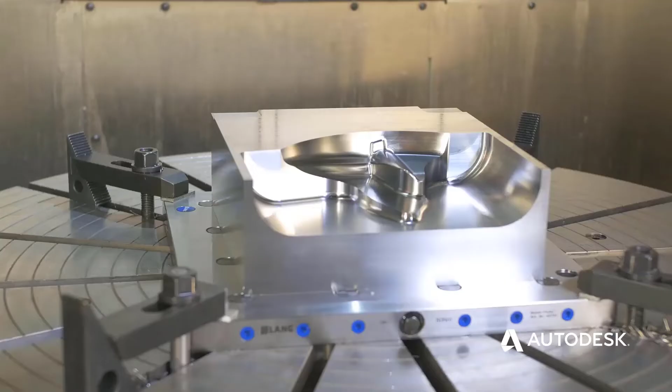We've got a really interesting part today. This is a traditional mold tool, and these are produced one-off, and then they're used in injection molding to create masses of parts. And this is exactly what this part is. This is a mudguard for a motorcycle.

Now, traditionally, this is machined as a one-off, as I said, but it's also machined out of a very hard material, a tool steel material. There's a number of key bits of geometry on this part today. So we've got some free-form surfaces. We've also got some complex geometries on the inside of the pocket. How would you traditionally go about machining this part?

Right, so after completing all the roughing and rest roughing stages on the job, I would then look to finish the steeper regions using a contour strategy. Contour is very good from anything from 30 degrees up to 90 degrees. Right. It gives you a constant step down, giving a real nice surface finish.

Okay. I would then machine the flatter regions. We'll have a choice of either a scallop machining or parallel machining. Got ya. And that will give us a nice even finish all the way across the flatter areas. Okay. This is actually a really good point.

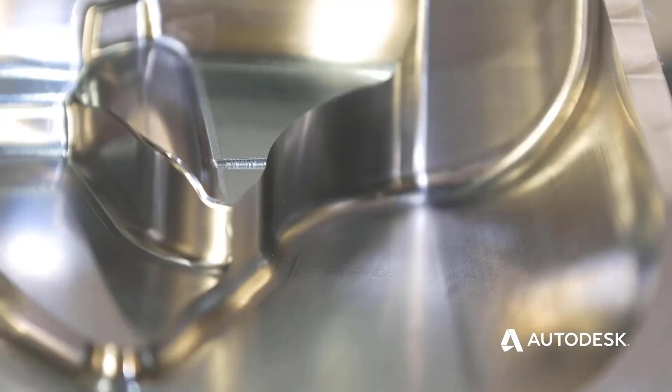Fusion 360 has just introduced a brand new toolpath called Steep and Shallow. And what this does is automatically identify the steeper areas of the part, as you've just mentioned, but also focuses on the shallower regions and then optimizes those individual regions of the toolpath and combines that into a single toolpath. Right, so I can now calculate just one toolpath to machine the mold instead of two.

Absolutely. With the new Steep and Shallow strategy, there's a lot of benefits to using the strategy that you may not be aware of. But the main benefit of this is that we get an improved machining time, but we also get an improved surface finish as part of that toolpath. So let me explain some of those benefits.

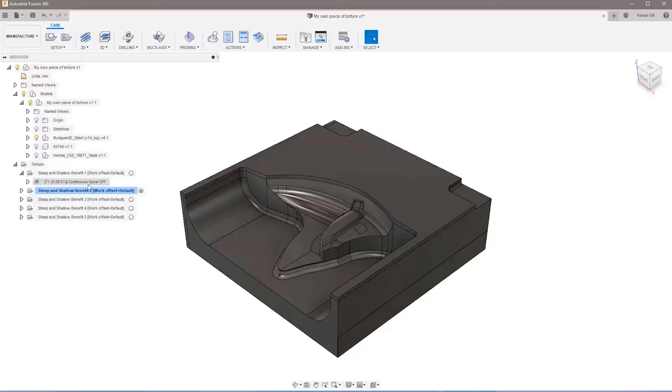Benefit 1, continuous spiral for an improved surface finish. When using the scallop option on shallow areas, the new Steep and Shallow strategy has the option to use continuous spiral. Now what this means is that the tool does not have to perform a step over between passes across shallower regions.

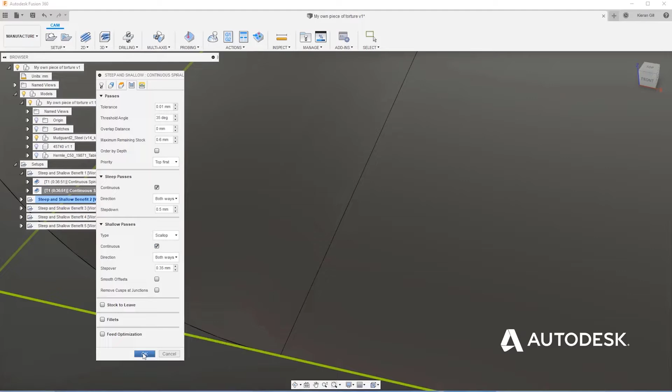Now this has the obvious benefit of reducing the cycle time, but the biggest notable benefit here is that with no steps between passes, we get an overall better surface finish. But also notice that there are no more linking passes when using the continuous option.

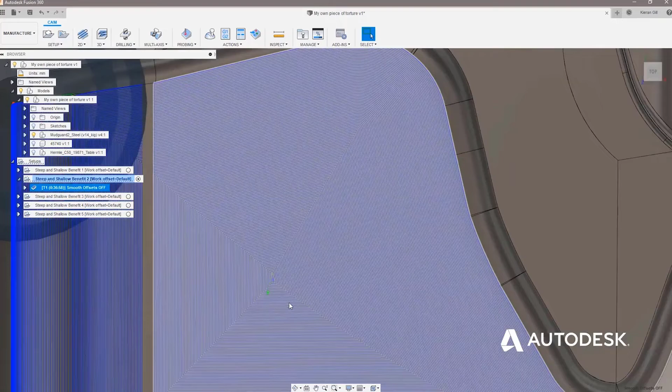Benefit 2, corner smoothing and automatic cusp removal. Notice on screen the sharp corners in this particular toolpath segment. Now when the machine tool sees the sharp corner coming up in the toolpath, it will automatically try to reduce the programmed feed rate. And this allows the cutting tool to change direction as it enters that particular sharp corner.

Now this does two things. Firstly, when the feed rate slows down, the cutting tool stops deflecting. And this can ultimately result in a small dwell mark being made on the part. Secondly, when the machine tool automatically reduces that same feed rate, the machining cycle time also increases. By eliminating all of those sharp corners from the toolpath, we can make the machining cycle time faster, and it improves the overall surface finish.

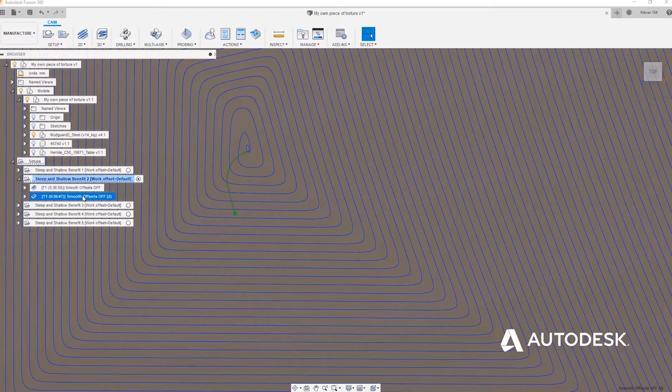Now it's particularly important at this point to note that the new Steep and Shallow toolpath has a centerline trace as its final cutting action. The centerline cut passes all over the small apexes to remove the tiny cusps of material where the cutting tool smoothly changed its direction on the scallop toolpath. Generally, this is just a nicer toolpath with a faster cycle time, resulting in a better quality surface finish.

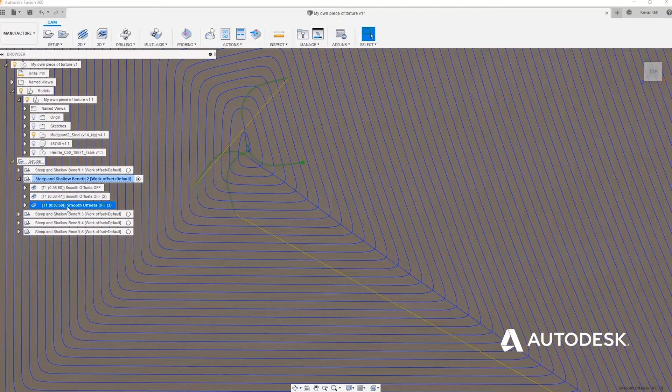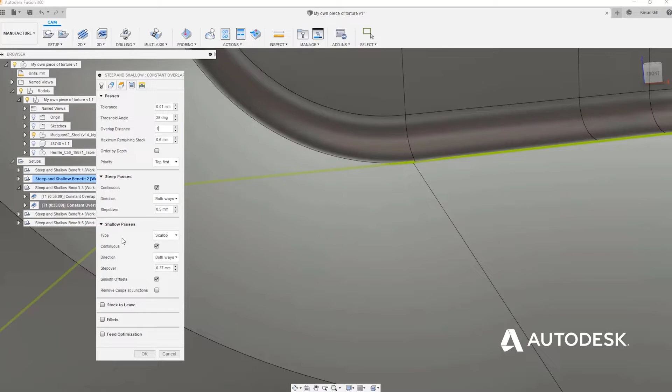Benefit 3, constant overlap between steep and shallow regions. Okay, so users of the new Steep and Shallow toolpath strategy can now enter an overlap value. Without this overlap value, the toolpaths for the steep regions and the toolpaths for those shallower regions step over at the same edge. And this can result in dwell marks appearing on the surface finish of the machined component.

Entering an overlap value will result in the toolpath for those steeper regions and the toolpath for those shallower regions overlapping by a user-defined amount. By adding an overlap between the adjoining areas of the steep and shallow toolpath, we ultimately improve the surface finish by slightly overlapping the edges of the toolpaths. By doing this, we extend the edges of the toolpath segments so that they step over in different locations, ultimately minimizing the dwell marks.

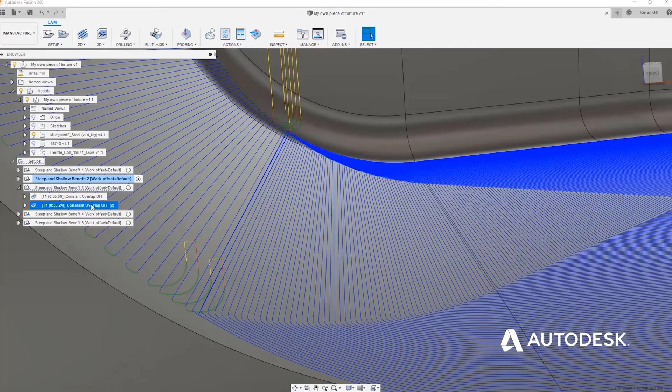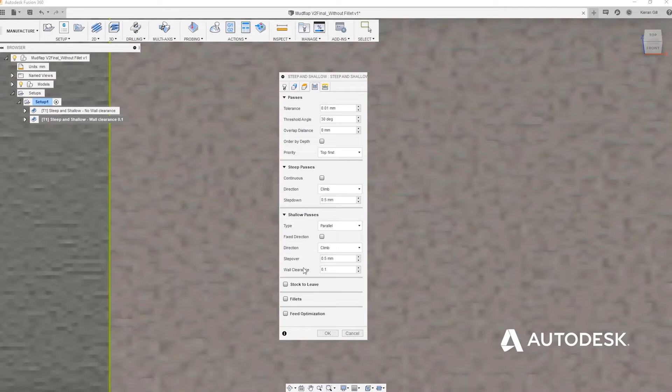Benefit 4, wall clearance with parallel. When machining shallow areas, one can also use the parallel strategy for shallow areas instead of the scallop toolpath. You can see that as we machine the bottom of this deep pocket, at the end of each parallel pass, the tool is going to approach the side wall of the pocket. This new steep and shallow toolpath strategy leaves the parallel passes slightly short of the steep wall, so as to avoid the tool touching the wall of the pocket.

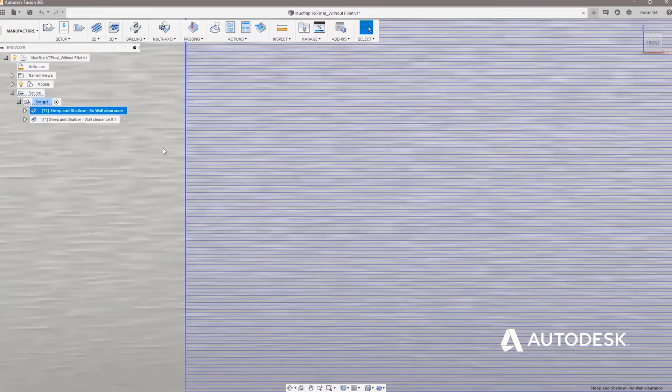The amount of gap left is user-defined, and it avoids the cutting tool touching these steep pocket walls, which would otherwise cause marks to form on the steep faces of the pocket. Now, we often refer to these marks on the side wall as being pecker tracks. Using this pullback value will result ultimately in a better surface finish, especially on the steep faces of the part.

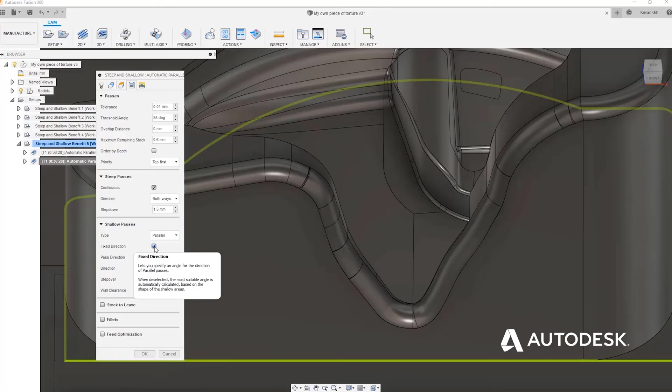Benefit 5, automatic parallel angle. The new steep and shallow toolpath strategy allows the user to select an auto angle option, which will change the way the shallow regions of the toolpath are calculated. When the auto angle option is activated, the optimum parallel toolpath angle is automatically calculated by Fusion 360 for each of those individual shallow regions of the toolpath.

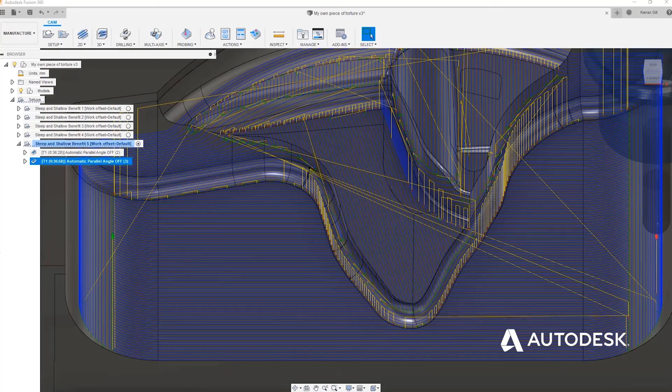So you can now see in the toolpath that each shallow region has a different parallel angle. The angle for each of these regions is automatically calculated to minimize the toolpath length, resulting in a faster and more efficient machining toolpath. Okay, great. So can we get set up and do some machining? Absolutely, let's do it.